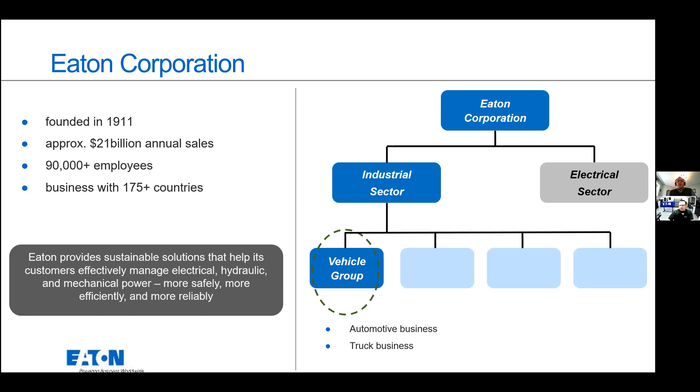So just before we start sharing some examples, let's briefly share with you guys what we mean when you hear us talk about Eaton, and especially Eaton Vehicle Group. Eaton is a big company - you can see some statistics around sales and the number of employees and what we do. Specifically, Eaton has two main sectors: industrial and electrical. Inside the industrial sector we have four businesses, and one of those is Vehicle Group, which is the business Alex and I are part of. Inside this business, we support both the automotive and truck business.

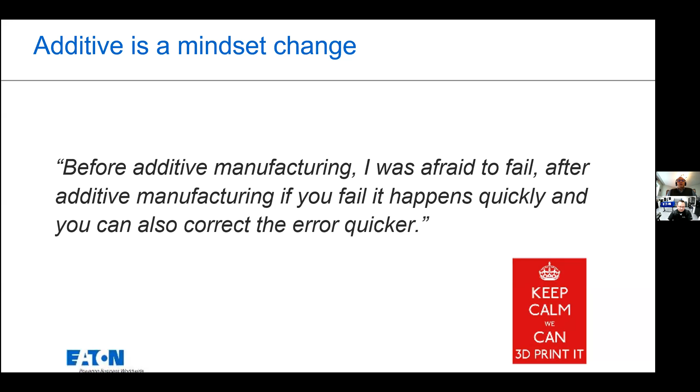Here's a couple of different perspectives for you on our journey, vision, and business, and how we are changing that. Our journey really started about 3 years ago when Alex and I first met, and we said, let's create a model that we can deploy additive in the same way globally. And when we say globally, we're talking about Brazil, Mexico, US, several countries in Europe, India, China, South Korea, and so forth - really a global environment.

So Alex and I got together and put together strategies. We put together a strategy that started with polymer printers, defined one model, and spread the polymer printers to all of our sites. Our teams started learning with that. We learned further, and then said, okay, now it's time to go into metal printing, still for non-production parts and prototypes, and that's what we're going to be covering today. That gave us a new set of learning skills that our team needed, and now we are starting our journey to production parts in metal as well, but that's a different technology than what we're going to be talking about on this call.

Our vision is that all of our technical teams, when they need to address a situation in the sites, or introduce a new product, really think about additive manufacturing as their first option when a tooling, a fixture, or quality safety device needs to be developed. That has been a very interesting journey and learning that is making our teams think differently, opening up a lot of new design opportunities.

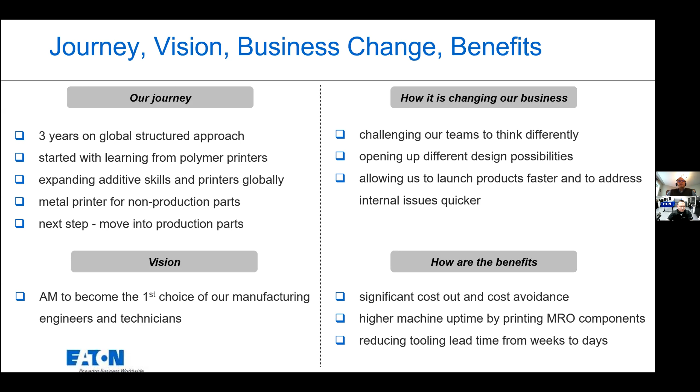You're going to see a couple of MRO examples that allow us, when the machine goes down, to 3D print those parts that otherwise you'd need to keep in inventory or buy from external vendors. The main benefit is really around lead time. Things that used to take 4 to 6 weeks to get a tooling from the vendors we work with are now a matter of days to get our toolings and devices 3D printed.

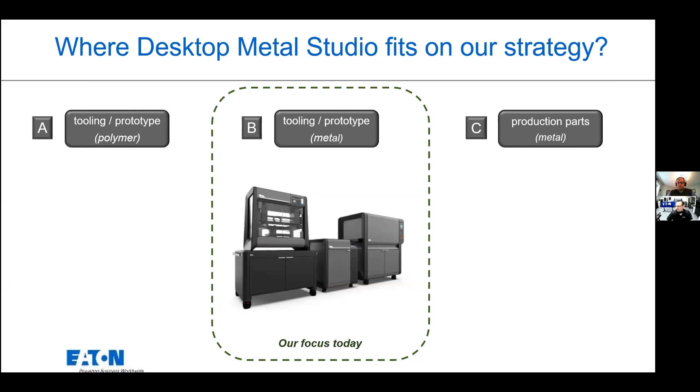Alex is going to share later in the deck some examples, even coming from Poland, which is considered a low-cost country, and even there you're able to obtain substantial savings.

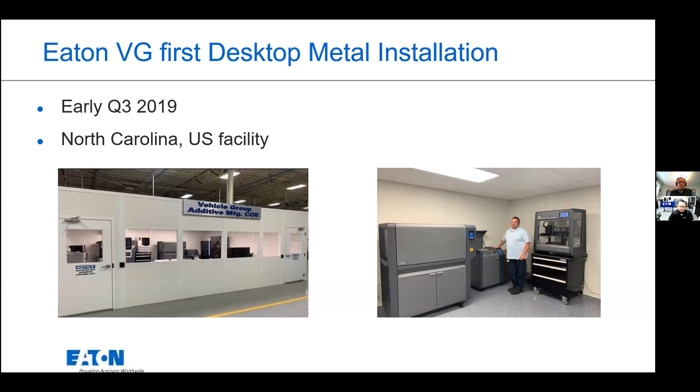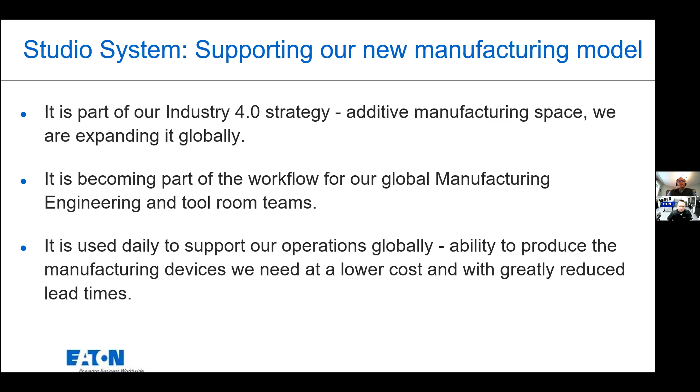Where does Studio fit in all these discussions we're having? For us, Studio was really a nice fit in this space, so we standardized Studio to be our printer, and we really drive our teams on a daily basis to leverage the Studio as much as we can to improve our overall performance and introduce new projects, for everything you can think of.

As we continue with this deck today, I'll turn it over to Alex in a second. Alex is going to cover first a few examples in the MRO space, then share some examples on fixture quality devices, and later share two or three interesting examples where we now combine both metal and polymer 3D printing working together in the same device. This was also a big learning for us, because not many companies do that. Most focus on either polymer or metal, but we were able to incorporate both together in some situations and achieve interesting results.

All right, thank you, Georgetti. I'm going to try to speak up. I have machines running in the background, and I'm not a loud talker, so just let me know if you can't hear me.

So this is MRO and machine spare parts. Just to give you an idea, maybe 30 minutes ago a maintenance guy came in and pulled a bracket off a Gleason machine. We didn't have a spare, but he had enough of one for this sensor arm part to give it to me. I did a quick scan, he did a temporary fix, and the scan took me 15 minutes. Now I'm creating the model so I can start a print job, which I'll have printing before I leave today. He's repairing that one just to get by.

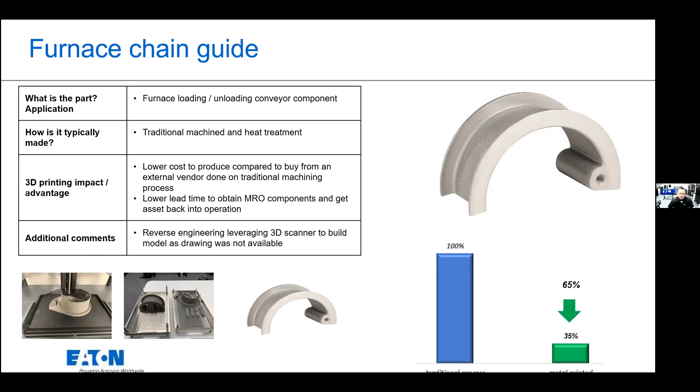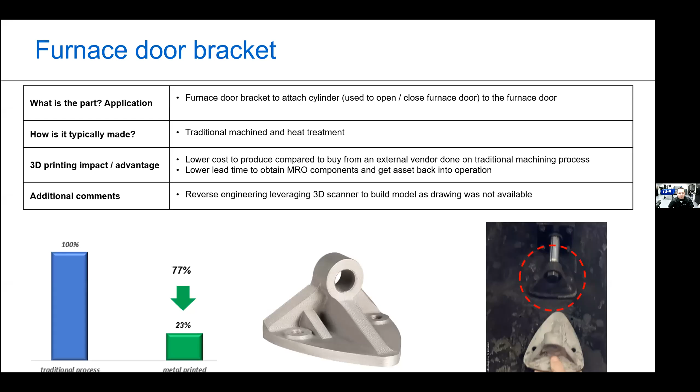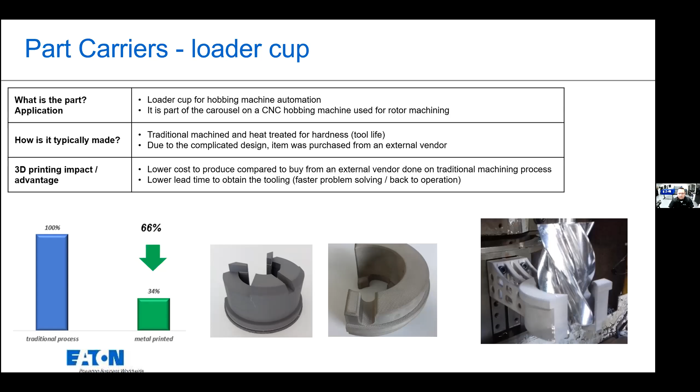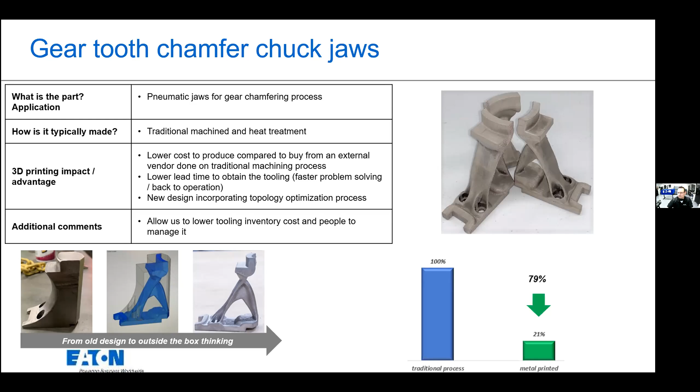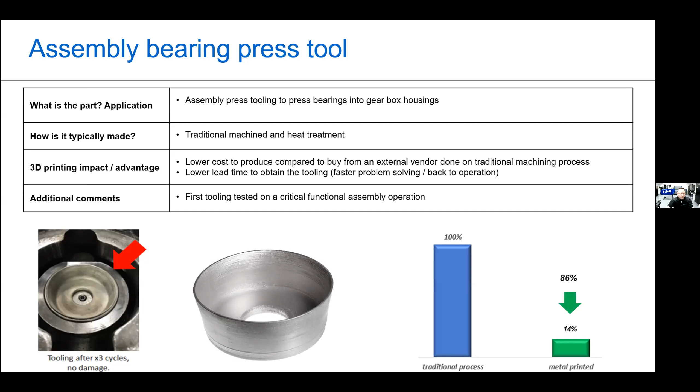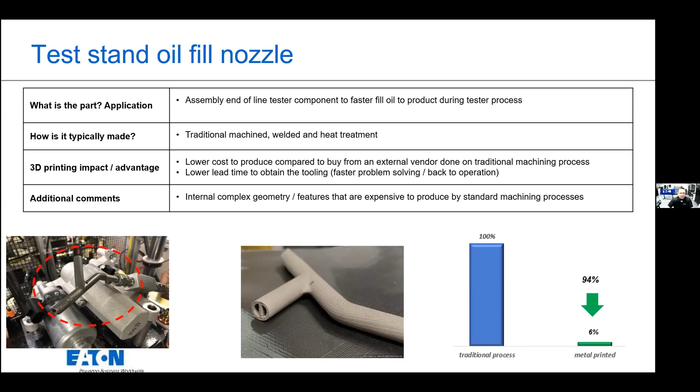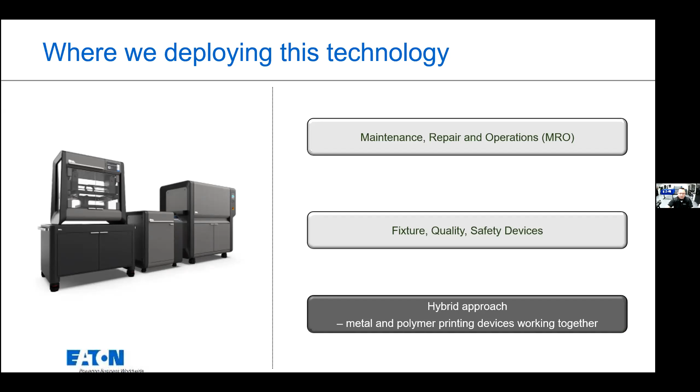So, going from metal, where you really see a lot of gains is where you combine both polymer and metal from a manufacturing engineering standpoint to solve problems in the shop. These are some examples of the hybrid approach.

In our Gear Lab, we have a collet that they use to attach shafts together. It was a polymer type collet before that was breaking from fatigue over time, but they connect these two shafts together and are able to do a gear check using the equipment in the lab - a high frequency production inspection. We were able to rethink this collet. We wanted it to be metal, but didn't want metal to metal contact on the final component. So we printed a metal collet, and then printed a TPU, an elastic thermoplastic that's super durable, and used that in combination with the metal. Now we have this elastic material contacting the part and not scratching it. This is a good example of both 3D printed polymer TPU and metal.

This one has roughly about 84% savings.

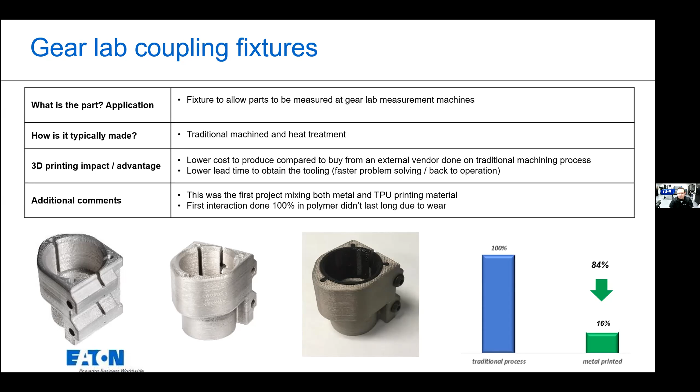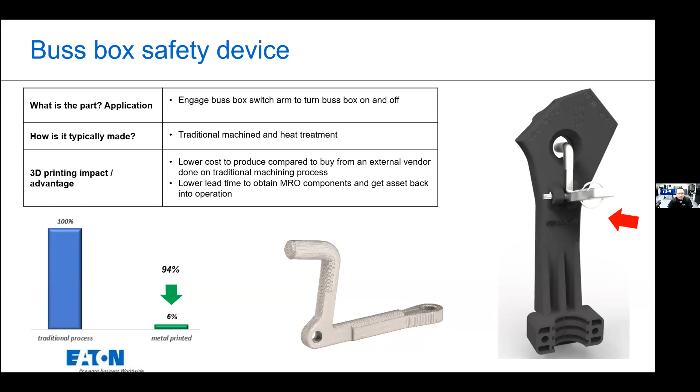And this is a good example of a safety device. With that said, Ilya, we are back to you to help us with any questions or comments from the audience.

All right, fantastic, tons of questions, I'll try to keep up. So generally speaking, what testing do you perform on parts, either in process or on the finished parts? Do you do any unique testing that wouldn't apply to other manufacturing methods?

I'll start and Alex, feel free to add. What we did, of course, is we did not jump to these more complex examples we're sharing today from day zero to day one. As we were learning this metal process, Alex and I set up three different groups of parts. As we learned more, we'd print one piece, put it in the machine, see how it ran, and measure hardness and those types of things. We built our confidence around that, and it evolved to more complex tooling until we got to the point we're at today, where we can handle important press forces or significant spindle rotations.